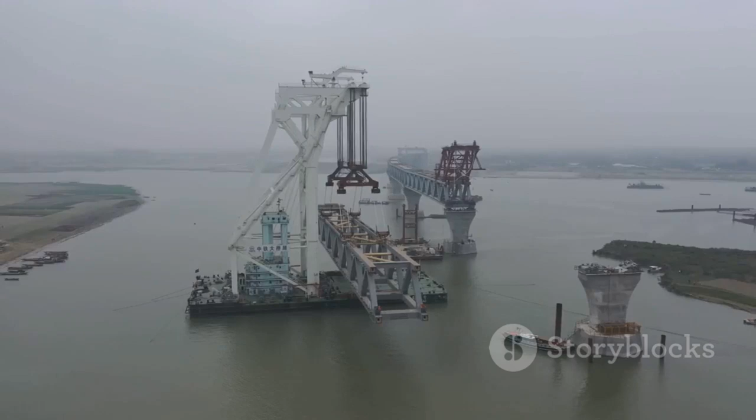Now, imagine something extraordinary. Picture a pathway stretching across its surface, not for ships, not for planes, but for people walking. This is the transatlantic footbridge, a bold vision, a project to connect London with New York City, two iconic cities, two continents linked by a thread of human ingenuity. It seems like science fiction, yet it is a dream we are beginning to explore.

The scale is almost too large to grasp. 5,000 kilometers, that is the distance this footbridge would span. Think about walking that far, across restless seas, underneath vast skies. It is a journey of incredible length.

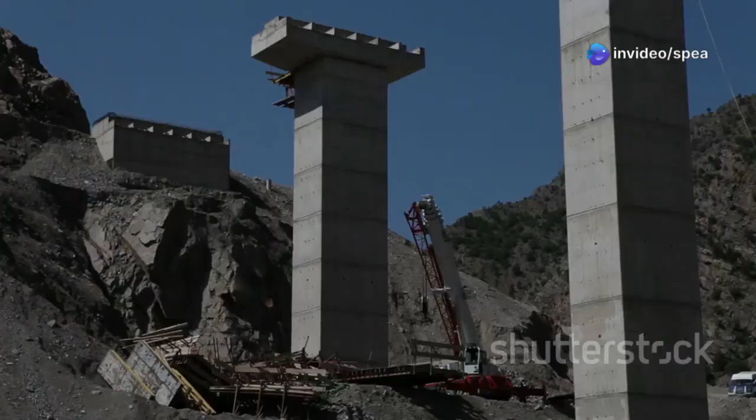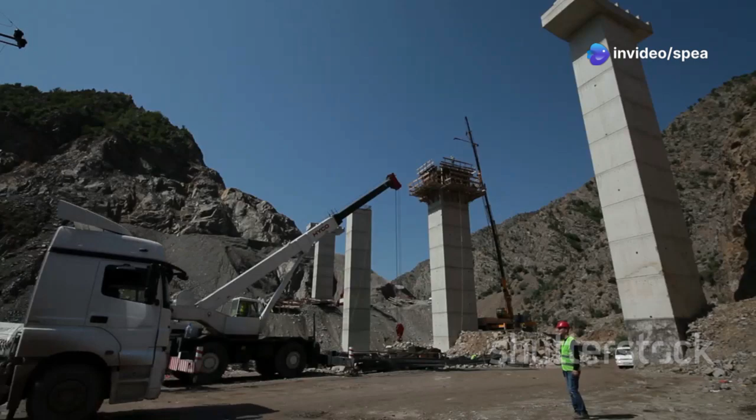This project pushes the very limits of what we believe is possible. It challenges our understanding of engineering. It tests our capacity for grand undertakings. The ambition is breathtaking. It truly reaches for the stars, or in this case, across the ocean. This is more than just construction. It is about conquering a frontier.

Why would we undertake such a colossal task? What drives us to connect landmasses in this way? It is the human desire for connection, to bridge divides, to foster understanding. A footbridge offers a unique perspective.

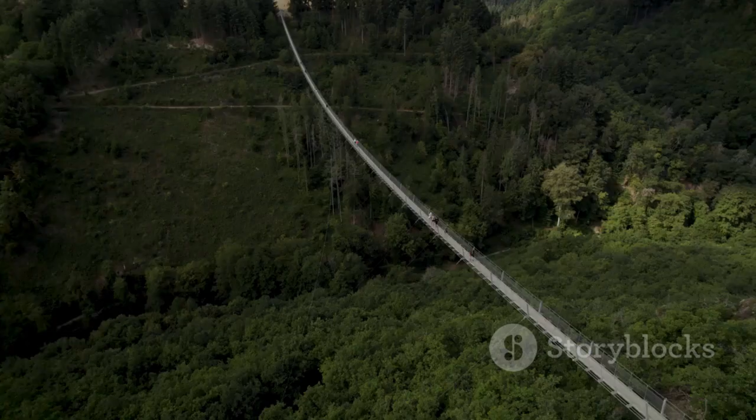It allows for a slow, deliberate journey, a chance to contemplate the vastness of our planet. It is a fundamentally human scale of travel. This project is not just about A to B, it is about the experience between. It's about uniting peoples and cultures in a new, profound way.

The very idea of a transatlantic footbridge is audacious. It speaks to our inherent curiosity, our need to explore, our drive to build wonders. Some might ask if it is even feasible. The challenges are undoubtedly monumental.

Many would say it is impossible, but humanity has always been drawn to the impossible. We look at great voids and dream of crossing them. This footbridge is a testament to that spirit. It is a statement of hope, a symbol of what we can achieve when we dare to dream big.

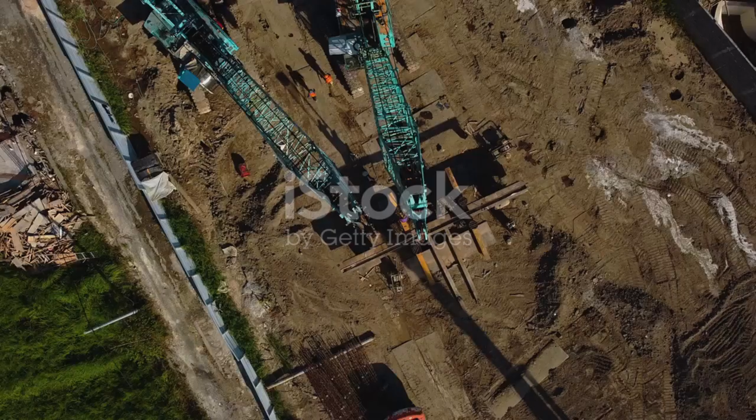Such a monumental vision requires immense resources. The estimated cost is staggering. 25 billion euros. This is a figure that demands careful consideration. It represents a significant investment.

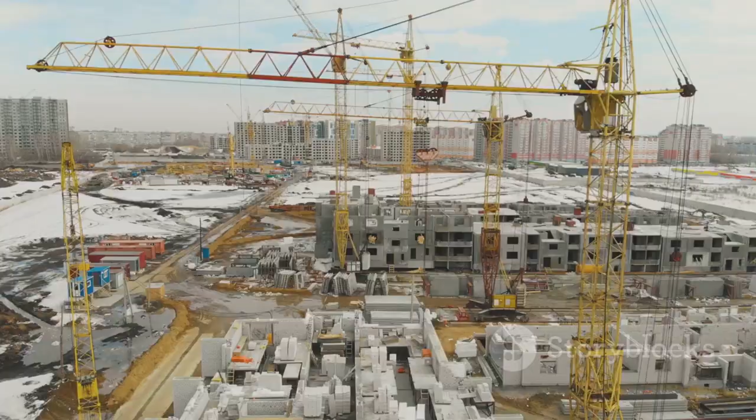It is not just money. It is resources, materials, and human effort on a vast scale. This kind of expenditure reflects the project's ambition. It underscores the belief in its potential value.

A project of this magnitude requires serious financial backing. It needs nations to come together. This sum highlights the scale of the engineering challenge ahead.

The funding for this grand endeavor comes from Europe. This is a significant commitment. It shows a collective will to achieve something remarkable. When nations pool their resources, incredible things can happen.

This European backing signifies more than just financial support. It is a vote of confidence in the project's feasibility. It is a statement about the future, a future where bold engineering projects can unite us. It also means the project carries the hopes and expectations of many. This support is the bedrock upon which the dream is built.

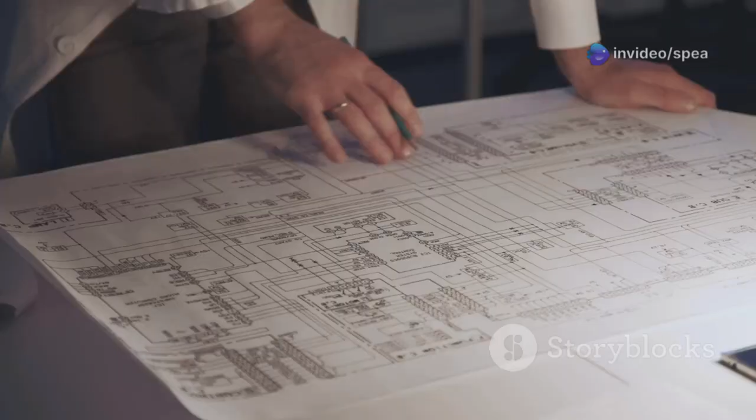The immense task of designing this structure falls to skilled minds. Engineers at SPE projects and manufacturing are at the forefront. They are the ones grappling with the practicalities. How do you build a 5,000-kilometer bridge across an ocean?

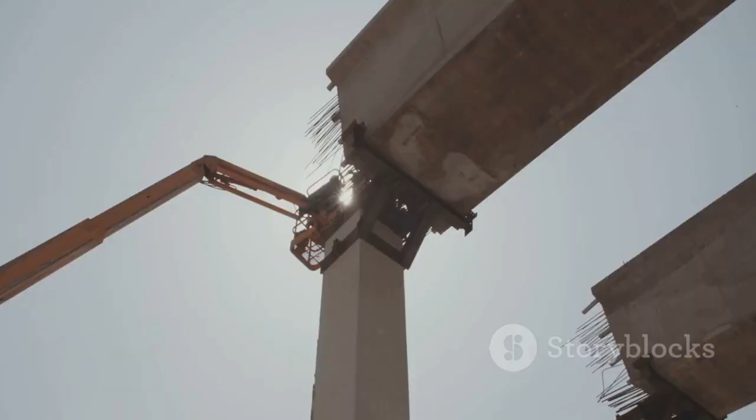Their expertise is crucial. They must translate this grand vision into a workable plan. This involves countless calculations. It requires innovative thinking. They must consider every single detail, from the largest support pillar to the smallest handrail. Their work is foundational to the entire project.

Where does one even begin such a design process? The engineers face unprecedented challenges. The ocean is a dynamic, powerful environment. There are no existing blueprints for such a structure. They must develop new methods. They need to push the boundaries of current engineering knowledge.

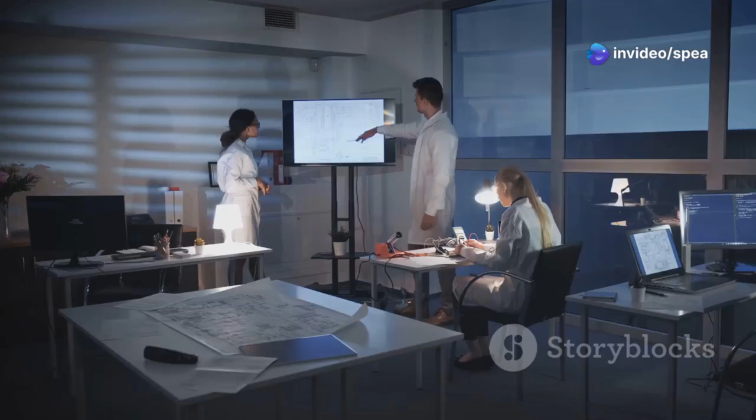Initial studies will focus on feasibility. They will explore different structural concepts. They will analyze the forces the bridge must withstand. The ocean's depth, currents, and weather patterns are all critical factors. This initial phase is about asking the right questions.

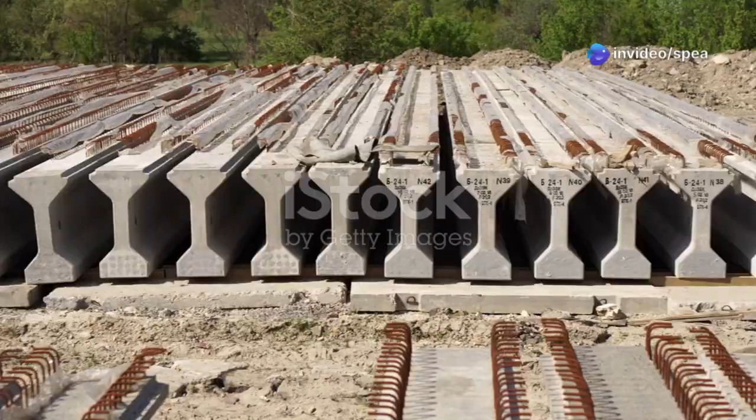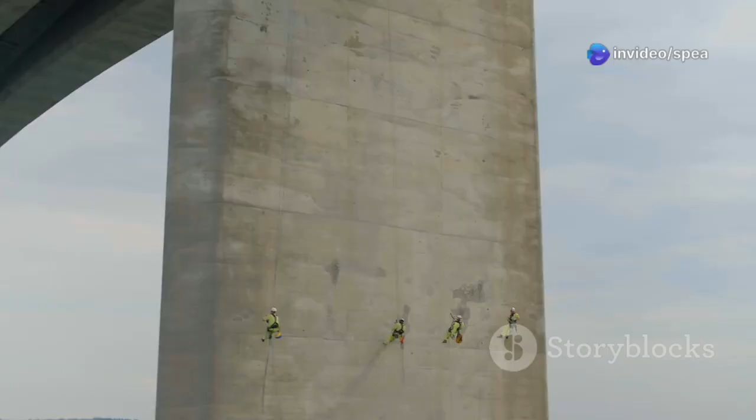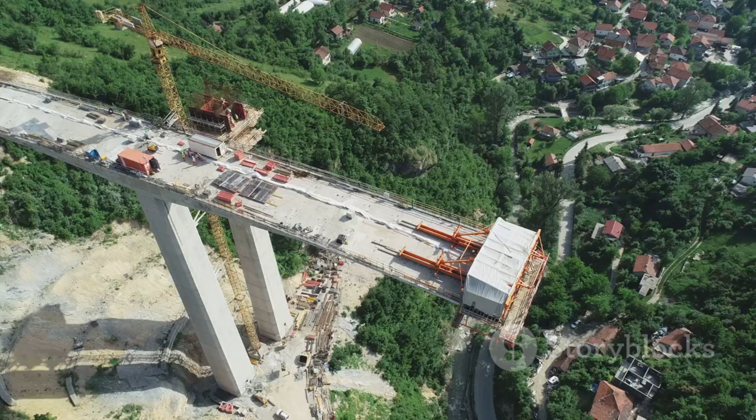The very structure of the transatlantic footbridge is a marvel in itself. Imagine its spine: it will be composed of around 200,000 concrete sections. This number alone is difficult to comprehend. Each section is not a simple mass-produced block. Far from it, each one must be individually designed and meticulously studied. Think of them as custom-made vertebrae in a colossal skeleton. This level of detail is essential for the bridge's integrity. It is a puzzle of epic proportions, with each piece vital.

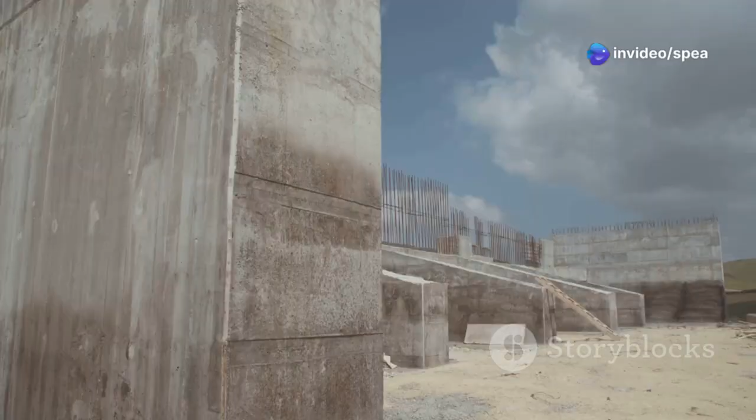Why this need for such individual attention to each section? The Atlantic Ocean is not a uniform environment. The seabed varies dramatically in depth and composition. Ocean currents exert different forces at different locations. Water temperature and salinity change along the route. Each concrete segment will experience unique stresses and face specific environmental conditions. Therefore, each must be tailored, its design accounting for its precise place in the overall structure. This ensures strength and longevity across the entire 5,000-kilometer span.

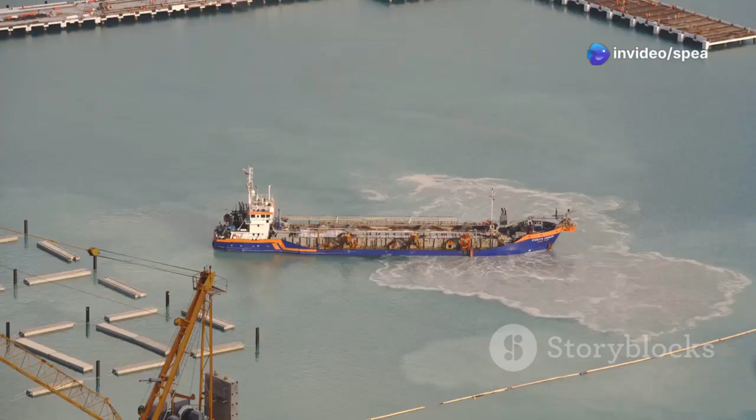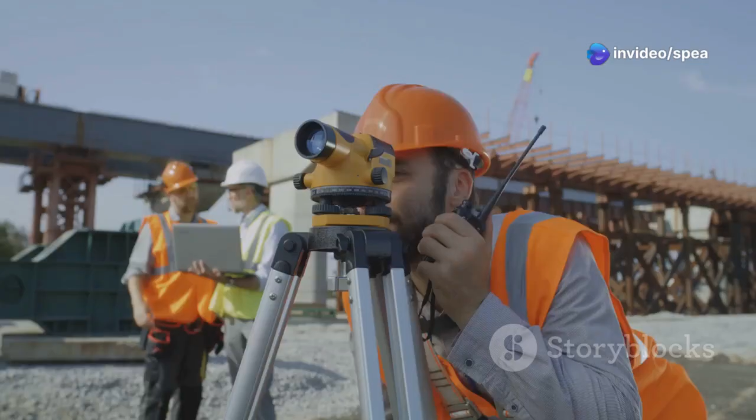The task of designing and studying 200,000 unique sections is monumental. It requires immense computational power. Vast amounts of data must be collected and analyzed. Oceanographic surveys will map the route in minute detail. Sophisticated computer models will simulate the forces at play. Engineers will pore over these results and refine each design. Precision is paramount; there is no room for error when building on this scale. This process represents a significant engineering feat in its own right, even before construction begins.

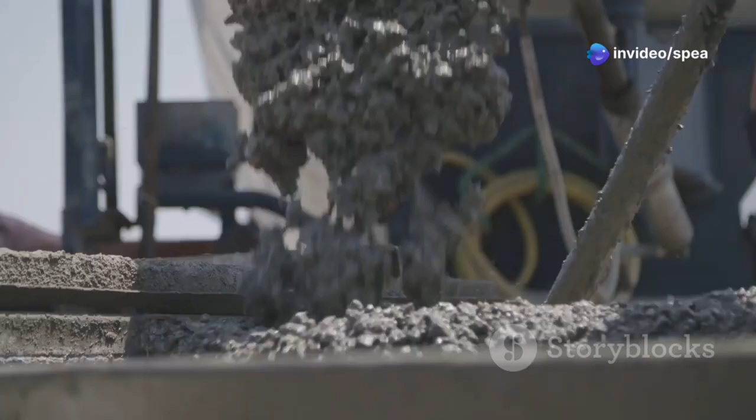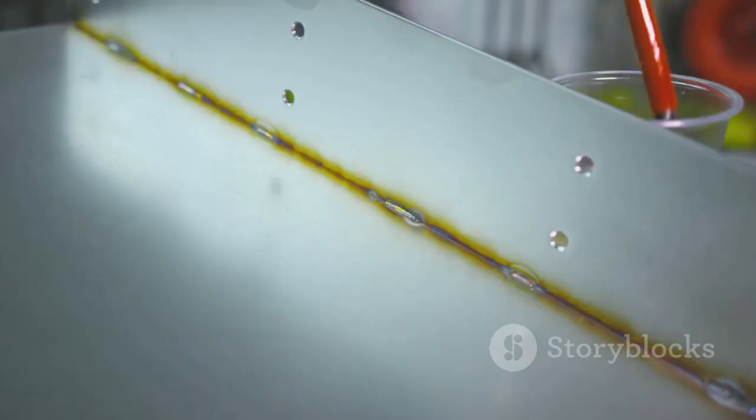This also poses a challenge for materials science. The concrete used must be extraordinary. It needs to withstand the harsh marine environment for decades, perhaps centuries. It must resist saltwater corrosion and endure immense pressures at great depths. It needs to be strong, yet potentially flexible enough to handle ocean dynamics. Researchers will be developing new concrete formulations, perhaps incorporating smart materials that can self-monitor or even self-heal. The innovation required for the bridge's very fabric is immense. This is about pushing material limits.

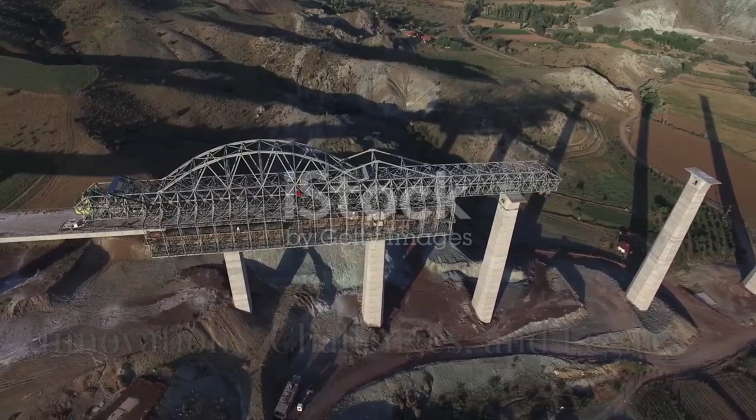Beyond the structural design of the concrete sections, other complexities loom large. The North Atlantic is known for its ferocious weather. The bridge must withstand hurricane-force winds and endure colossal waves. In northern sections, it might encounter sea ice or even icebergs. The safety of walkers is paramount. Then there is the marine ecosystem: construction and the bridge's presence must minimize impact. We must build with respect for the ocean's inhabitants. These are not small considerations; they are fundamental design drivers.

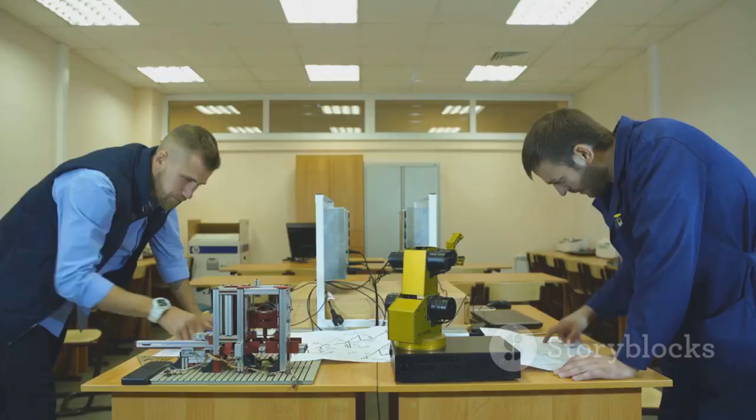Overcoming these challenges will demand constant innovation. We cannot rely solely on existing technologies. New construction methods will be needed. Perhaps autonomous underwater vehicles will play a key role in assembly. Advanced sensor systems will monitor the bridge's condition in real time, predicting and warning of any potential issues. Power generation along the bridge will be vital, maybe harnessing wave or wind energy. Every aspect of the project, from logistics to maintenance, will require fresh thinking. It is a testbed for future technologies.

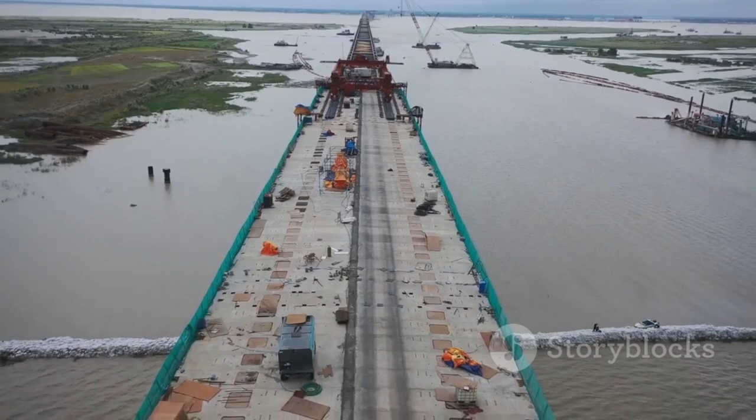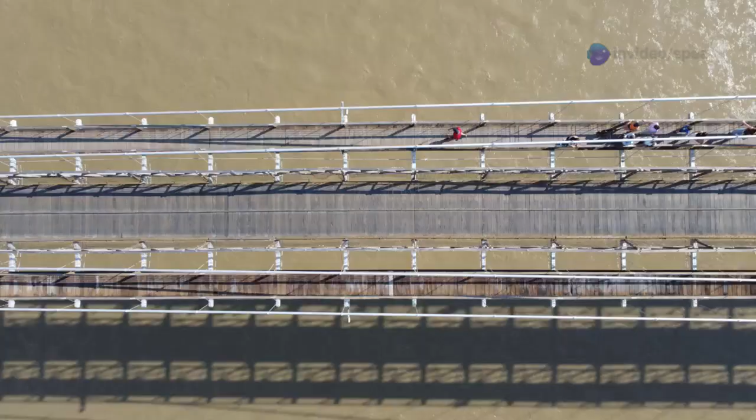If successful, the impact of the transatlantic footbridge would be profound. Imagine the cultural exchange: people from all walks of life meeting on this unique pathway. It could foster a new sense of global community. Economically, while not a trade route, it could spur tourism and related industries. Scientifically, the bridge itself could serve as a platform, a 5,000-kilometer-long ocean laboratory, for studying marine biology, oceanography, and climate change. It would be more than a bridge; it would be a destination, a source of endless discovery.

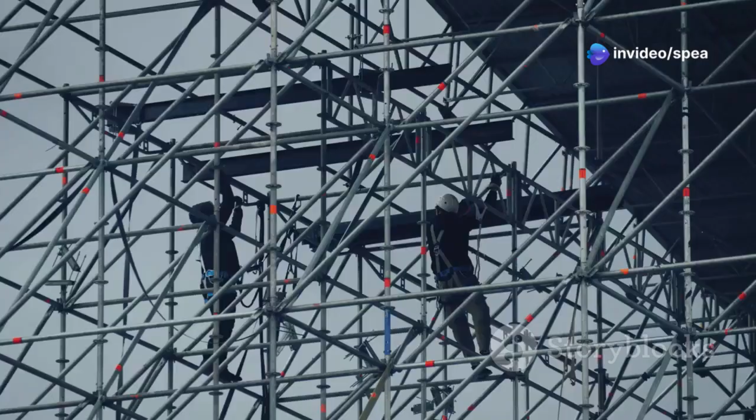Ultimately, the transatlantic footbridge project is a statement. It is a testament to the human spirit of exploration and creation. Like the pyramids or the journey to the moon, it speaks of our desire to achieve the seemingly impossible. It pushes us to innovate. It forces us to collaborate on a global scale. Whether it is fully realized in our lifetime or not, the very act of planning it expands our horizons. It encourages us to dream. It reminds us that even the vastest oceans can, perhaps one day, be bridged by human endeavor.